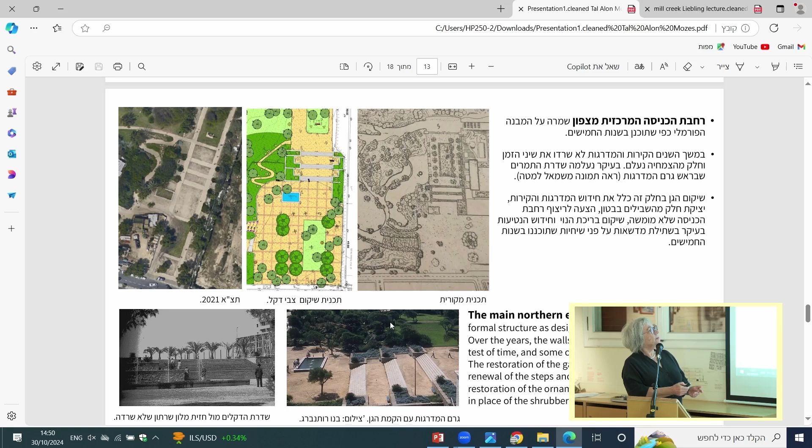הפרק הזה שמסרב לעבור, I can't, לא, אני הגעתי לסוף כבר. אתם הופ.

אפשר להעביר את המצגת למוד של תודה.

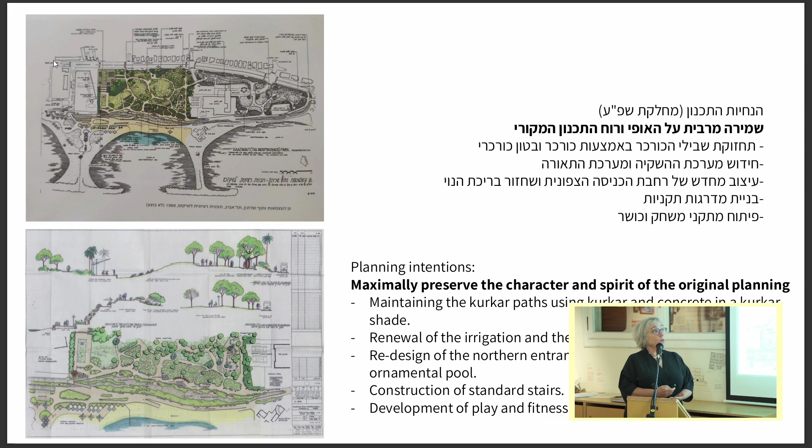מה שמעניין הוא שמי שהציע את השימור של הגן או את הפרוגרמה לשימור הגן זה מחלקת שפע, שיפור פני העיר של העירייה. הדגשתי בבולד שהעירייה בעצמה ביקשה לשמר במרבית את האופי ורוח התכנון המקורי, רוחו של אברהם קרוון, כאשר העירייה ביקשה בעיקר טיפול בשבילי הכורכר, חידוש מערכות כמו תאורה והשקיה, ודגש מיוחד על רחבת הכניסה הצפונית, ושילוב של פרוגרמות חדשות של משחק, ומאוחר יותר גם התייחסות לשיקולים של קיימות ושל טבע עירוני, שכיום חלק מהגן.

מי שהופקד על השיקום של הגן והשדרוג שלו היה אדריכל נוף צבי דקל, אשר נפטר לפני שבועות ספורים. הוא היה מודרניסט בהשקפה שלו, עבד עם בורלה מרקס בברזיל ולמד איתו, וכאן אנחנו רואים את תוכנית השיקום שהוא הציע.

אתם רואים את המרחבים הגדולים של הדשא, את השיחים בשוליים, את השיקום של רחבת הכניסה מצד הצפון, ומצד שמאל אפשר לראות את רחבת המשחק שבסגול.

אם אני אקצר ואדגיש כמה מהמרחבים האלה שעברו שיקום, אחד מהם הוא רחבת הכניסה מצפון, והיא שמרה פחות או יותר על המבנה שלה. אפשר לראות את התוכנית המקורית, את התוכנית של צבי דקל.

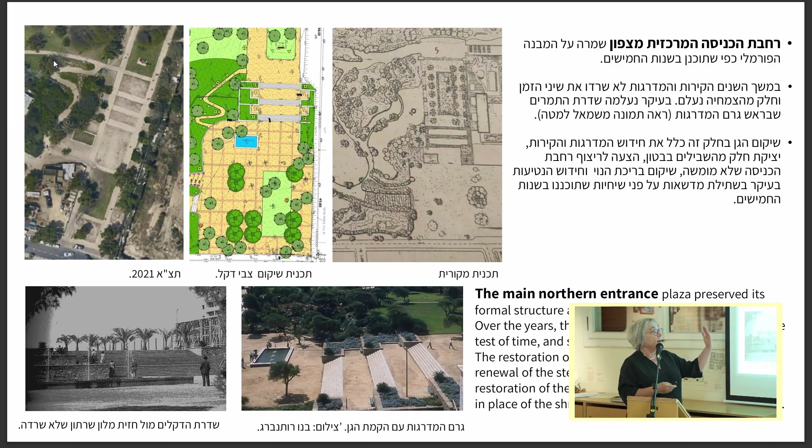חלק מהאלמנטים לא נשמרו בגלל שיני הזמן, כמו למשל שדרת הדקלים, ובגלל שבשנים הראשונות לא כל כך הבינו את ההשפעה של הרסס ושל המליחות. ובכלל, גם אחרי הקמת הגן קצת שינו את הטופוגרפיה שלו ויצרו הגנה על החלק המרכזי. הצמחייה של הגן נשמרה בחלקים רבים ממנו, אבל במשך השנים הלכה והידלדלה, והשילוב הזה של צמחייה מקומית מצד אחד וצמחייה ואזורים של מדשאות פסטורליות מאפיין את הגן עד היום.

פרטים עדה תפרט, אבל כאן אפשר לראות כמה דוגמאות יפות שנשמרו מימי התכנון הראשונים של שנות ה-50, של שימוש בכורכר בקופינג, במדרגות, ברחבות, ברצפות, וניסיון מאוחר לקחת את החומר הזה של הכורכר ולהפוך אותו לחומר יותר עמיד על ידי מה שנקרא בטון כורכרי, שכיום משמש חלק מהטיילת שבעבר היה כורכר כבוש.

וכבר הזכרתי את העניין של המעקות שהפכו להיות מעקות תקניים כפי שצריך. ואלמנט כמעט אחרון זה הבריכה הפסיפס של האומן שמעון צבר, ששוחזרה על ידי האומנית טלי שרמן, על ידי שחזור מאוד מדוקדק של האיורים שהיו בבריכה המקורית ומילוי שלה במים. אבל הבריכה הזאת עברה גם איזה טלטולים אפילו לאחר השימור הזה.

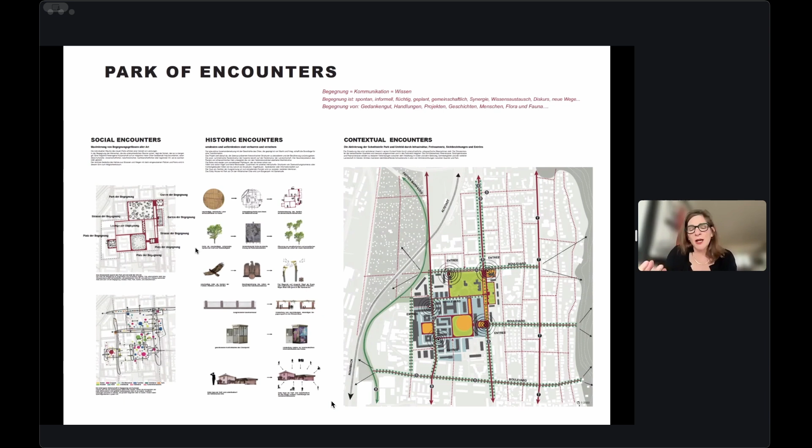So on one side, a maximum of historical encounters. What you see here is the concept from the competition: social encounters, historical encounters, and contextual encounters. I'll focus today only on the historical encounters. On the other side, the maximum of contemporary uses, so it speaks to both sides of us.

This is the historical aspect of the site. There are all these spaces and elements that are about control and power—that's what military occupation is. I wanted to keep those elements and make them the main storytelling of the park, but at the same time transform them into places and elements of social encounter.

So it's a double-edged sword: when you walk in the space, what you perceive atmospherically and physically is the military history, but then, tucked into that in a more subtle way, unfolds a very big palette of contemporary uses.

The reason I did that is I felt sensing these spaces was important to reflecting the history, but also because our cities have become so generic—all the places look the same.

Everyone puts a bit of lounge furniture or catalog furniture and a few nice trees, whatever. I think cities need to be a place of differentiation. They need this storytelling—they need to tell us about their history and where they've become.

I'll give 2-3 examples from this matrix, which I also did for the competition. The oak tree is a very famous historic symbol for power and strength. The Nazis took it over as one of their symbols. I made it the main tree species of the park, and so to speak, gave it back to the German population.

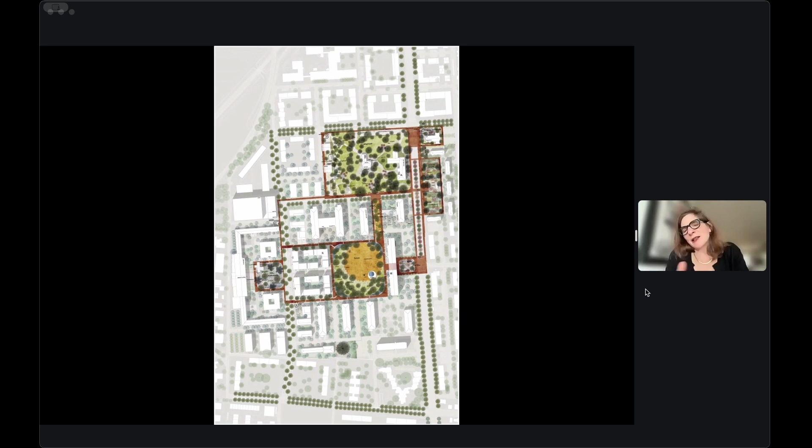Oh, sorry, just one last picture. You see here a vertical space connecting the parade grounds, or Forum, with the Nazi elite park, which is now called the Lounge. It's next to student housing and other uses, and I'll show you what I've done with these different spaces.

So this is the picture. I forgot to say explicitly, but I'm sure you got the message—we were able to win the two-phase competition, and it was just finished being built last year. So you'll see fairly recent pictures of the park.

I took former paving from the site and inserted very tiny little plazas around the park where researchers in the surrounding buildings, students living there, the neighborhood, and so on could appropriate these small spaces, while the park would keep its atmosphere.

This is what I call the cultural market, using this space in front of the cultural and creative activities. Here you see a little scheme I made for the competition.

These red lines show what we call the red band—a concrete paving band, which I'll show you in a moment, that unifies all of these spaces.

So the main concept, as you see in this black sketch, was that the unique historical atmosphere and task of each space was kept as its own distinct voice of its historical use as a military space, and I tried to preserve that with everything I did.

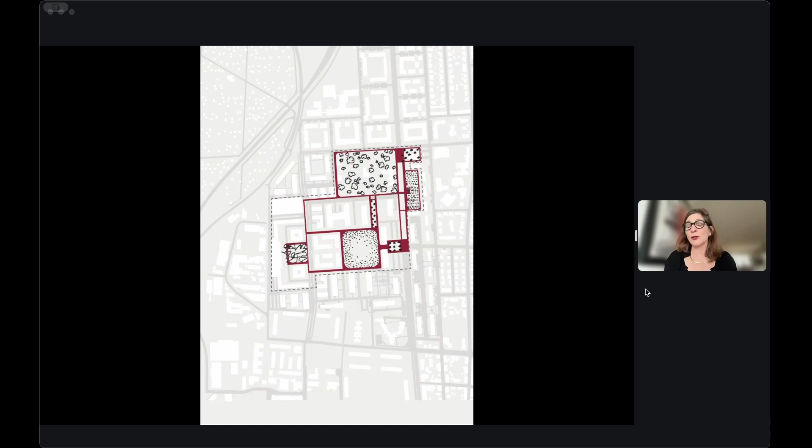And the red band, so to speak, unites them all into something we can coherently understand as a park.

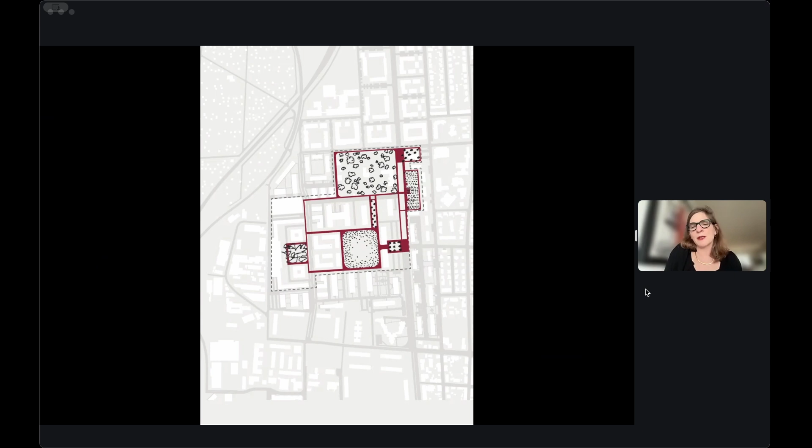For the red band, we decided to shred the many pavements found on site—these crappy concrete pavements from the Americans, and also natural stone paving from the Nazi period, and so on.

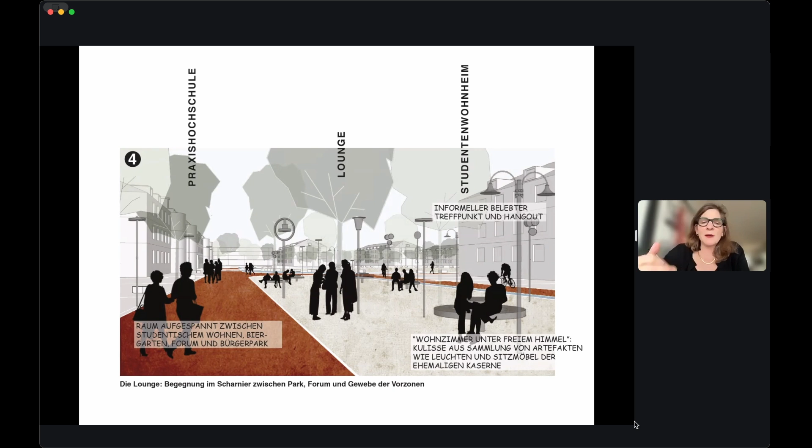They're speaking to us. For the lounge, it's this thin space connecting the major spaces. To the right, you see one of the old barracks from the 1930s, that will become student housing - it's not there yet. And behind us, the main building which I showed you in the beginning will become a school, and you see all the barracks buildings around.

I found this American furniture - the lamps, the benches and so on - so charming in their historical aura that I decided to make something called the lounge, an informal place for meeting of students, but also passersby, researchers, neighbors, etc., and they would just collect in these kinds of spaces. You see these kinds of cartoons which we made. I felt it was important to express the social uses of the spaces through these cartoons, to communicate this during the competition.

Here you see a photo also during the construction site. Everything's quite young, but you see the space with the furniture and the lamps, and it has really its own character, and it's very charming. Now the neighbors really come and fill up this space and love to meet here and sit casually and so on.

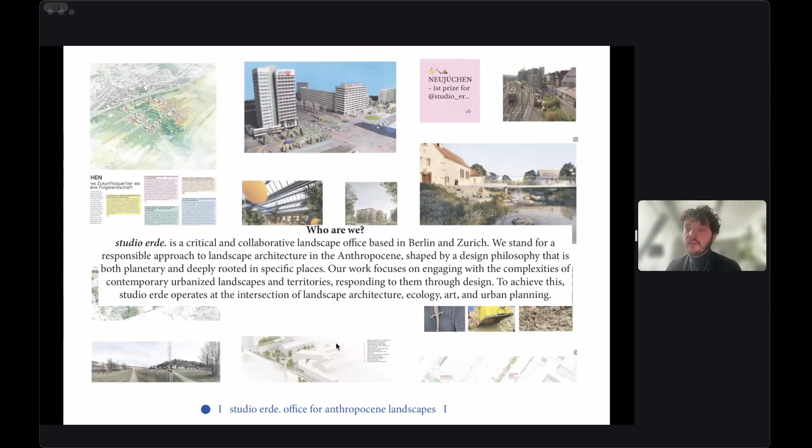Before that, maybe just some short notes about who we are. We are Studio Erde, it's me, Marcel Tröger, as already introduced by Sharon and Violetta, and we have offices in Berlin and Zurich. We are working for, or towards, landscape architecture in the Anthropocene. We believe that our picture of the landscape, this romantic picture a lot of us still have in a way, is kind of broken, and we have to rethink our attitude and responsibility in this new era.

That's why with our projects, and especially also the House of Statistics project I will share with you in a minute, we are trying to develop a new critical attitude towards designing, and questioning how and in which different ways we can design within different scales and with different actors.

And this is also part of the project for the statistic, where we were trying strongly to work not only with things we already know, like landscape architecture, plants, soil, but also with other metabolic systems and actors, such as animals, energy, infrastructure, but also a lot of rituals and practices.

House of Statistic, our project City as Stage, or Catalyst of Imagination. It's a project for two main squares adjacent to Alexanderplatz, so we are right in the heart, in a way. Berlin doesn't really have a center, but it's the historic center of Berlin.

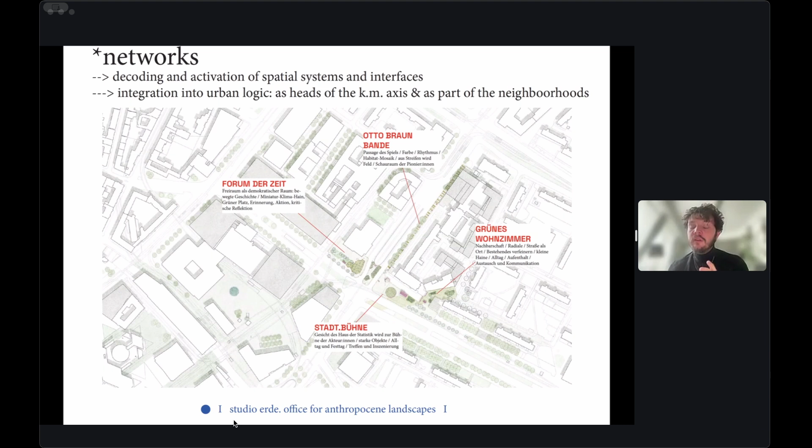We worked, as I already said, at this edge of Karl Marx Allee, but also close to Alexanderplatz. So we had to integrate ourselves into this logic of the urban structure, but we were also looking deeply at what actually was happening there.

What's interesting is that the GDR, by building this Karl Marx Allee neighborhood, erased almost entirely the whole historic city structure of Berlin. So you almost lost any reference to what was there before.

However, you can still find a lot of traces in the soil. You find traces of churches which were moved and erased. You find a lot of infrastructure beneath, and tunnels—there's a big network of tunnels beneath Alexanderplatz and also beneath our squares.

So we played with those revealed objects and traces, but we also played with the different networks we found, as I already showed you, the social network which was there. How, in a way, can the social network be related to this spatial network and those hidden objects?

That's why we identified and played with some cards—we call them play cards. We identified 14 objects, hidden or maybe existing, which serve as the main protagonists of our design scheme.

We didn't propose a complete transformation of the squares, but a very precise, and sometimes only acupunctural, reactivation of specific objects.

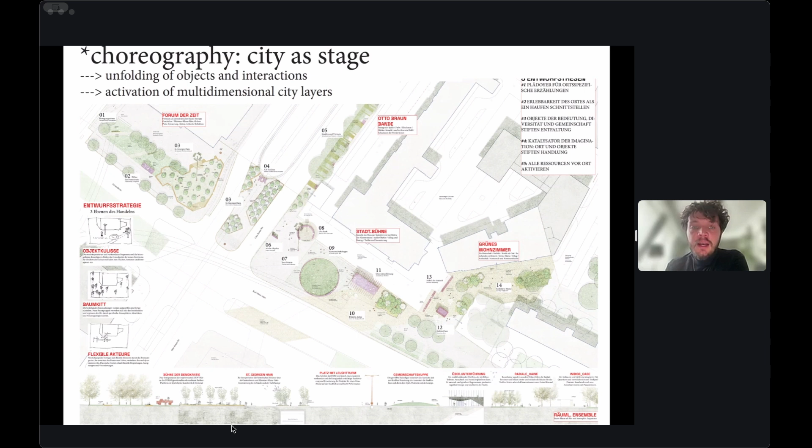This is a layout plan of the design. I will just go briefly through it now with some focuses.

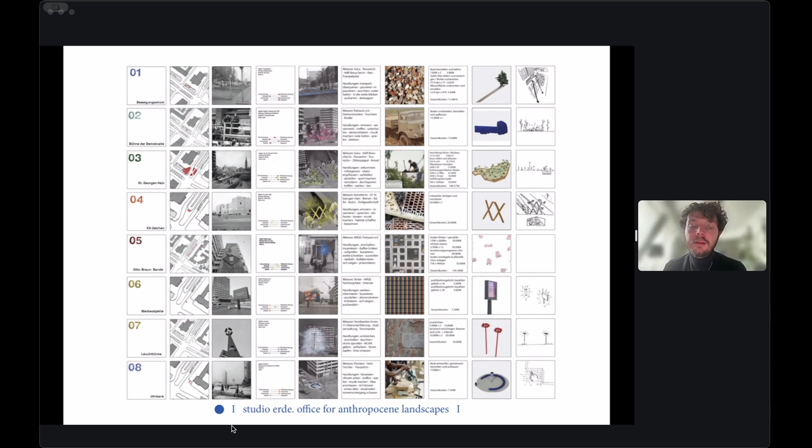What was a big part was thinking of this project as a process. So, as I said, it's a temporary project, and this temporality gave us an option, a framework to test out new things. I think this is also very important for Tel Aviv—that temporality is a vehicle for testing out new things.

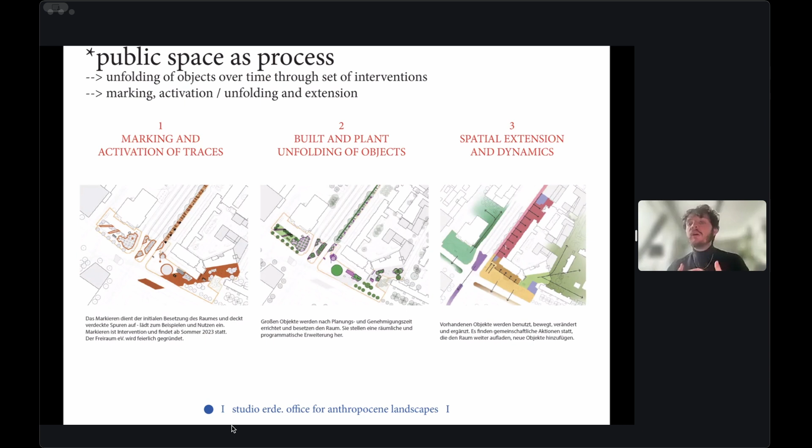So we had, in a way, a time frame of five years where we worked, first of all, in the first phase, with marking and activation of those traces. Then how those traces can be built, but also accentuated by plants. And then, in a way, how—maybe after they are rebuilt—they still dynamize and have an impulse towards the neighborhood.

A big part was also to integrate those objects into local metabolic flows. So a big goal of the project was also to build with the least new materials as possible.

This also contained plants. We're working together with a local tree nursery, Lorberg, one of the biggest tree nurseries in Germany, and they give us trees for free. This is a picture from one of the site visits there - trees which they usually would throw away because they are not perfectly grown, they have some mistakes, and we reintegrate them.

It's also part of an art project my office partner Violetta is doing together with Andreas Greiner, called Wild Woods. I'm sorry, I think you hear my little daughter Tal - she's screaming a bit, sorry for that.

Another part is also not only to reuse plants, but also to reuse water and energy. So our objects also create energy. For instance, there's this pavilion which Bell Architects is doing, which accentuates a tunnel underground situation - it sits on an underground tunnel and accentuates this hidden infrastructure, which produces energy through PV panels on the pavilion.

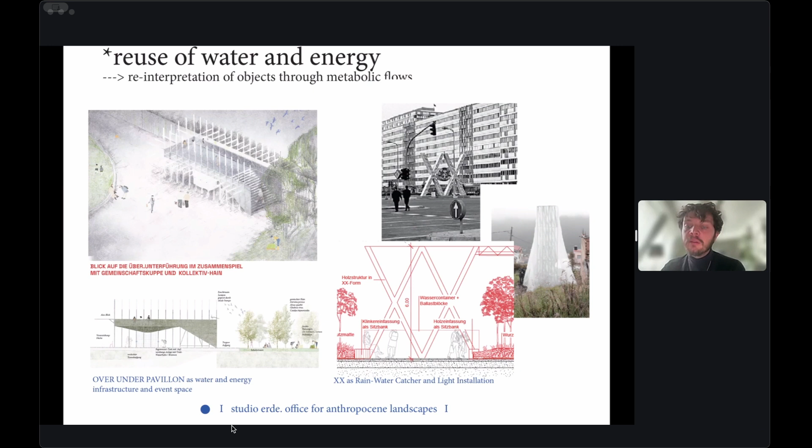It also collects rainwater which then serves for watering of the trees nearby. But also this structure, which is a direct reference to a GDR sculpture that was there, also serves as a rainwater collector.

We worked a lot with those aesthetics of temporality and those different actions that come with this strategy, and also this idea of how to integrate local materials.

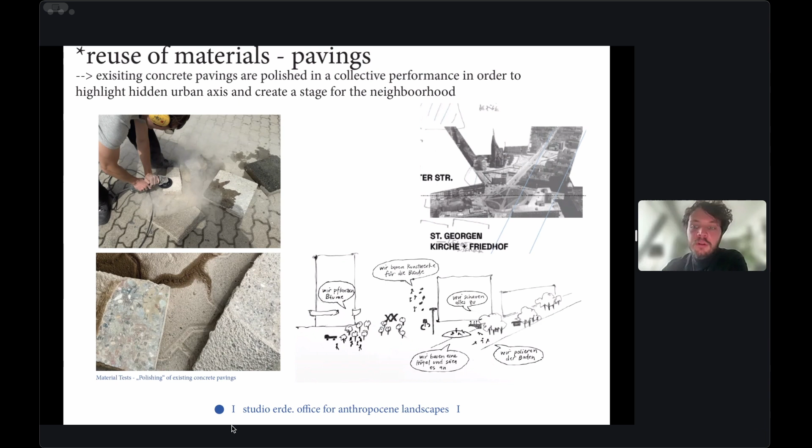Also in terms of very tiny interventions, for instance this idea of polishing - how can we accentuate the existing pavings? A lot of the square is covered with concrete pavings, and we are proposing this idea of a performance of collective polishing for one of the axes. You can see a little material experiment we did some months ago, where suddenly almost a terrazzo atmosphere is created through a very tiny intervention.

It's all kind of also integrated within this idea of a curational network. We developed this framework, and I think this is also interesting for Tel Aviv maybe, and for more experimental projects - of course, for testing out those experimental projects, you need actors you can rely on. You need to build a network of actors who will care for those spaces. That's why we proposed in a way an amuta, like a corporation, which serves as curators for the development of those sites.

This is the last slide. As I said, this was a first activation last November, where we did a lyrical promenade at night, where we lit our different interventions and read poems on those interventions to give a glimpse into a potential future. Currently we are in the phases of permission, and we hope that in the next months there will be first results we can share with you. Thank you, and looking forward to the discussion later.

Thank you very much, Marcel. I think it's very important to understand that we would also like to engage community in the activity of public space. And how do we do it? It's a very interesting possibility that you showed us with public participation.

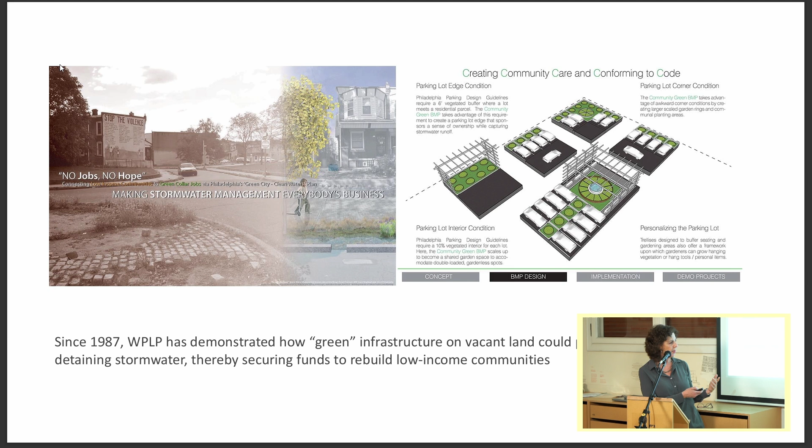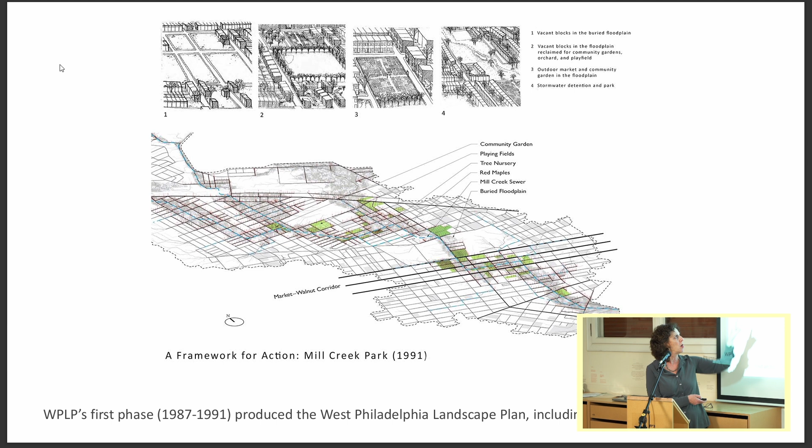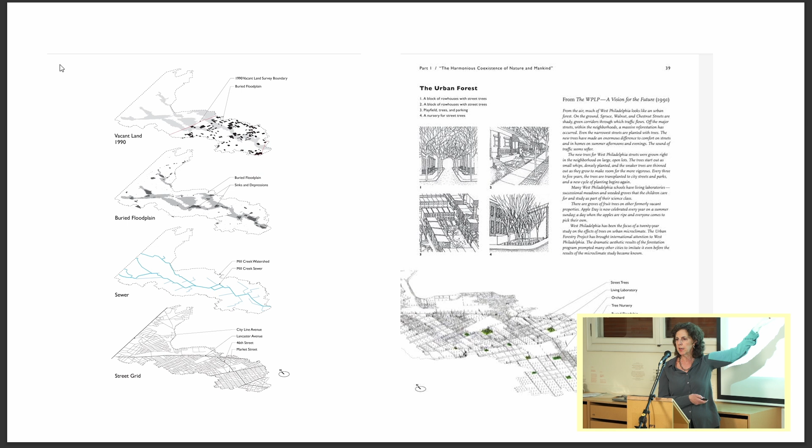You can see further examples of the studies provided in the first phase of work done by students that led to a proposal for the West Philadelphia Landscape Plan, looking at these networks of urban parks, with some images above showing what they can look like. We have more analysis of the interrelatedness of these systems on a citywide, or at least a watershed, scale. We also see the local implementation and the physical expression of what they might look like. This is, again, student work.

Some of this work also had to do with designing community gardens. This is one example you see here. This was done later, so it had a multifaceted aspect to it.

One thing that was very interesting about what was happening with this work is that all of this work I showed you previously led up to a plan, but the plan was never adopted by the city, which led to incredible frustration. And yet, it led also to a very interesting second phase of the project that I want to now talk about.

Spirn began to realize that she needed to focus on education. And she started to ask a second research question: how could local youth be engaged and empowered to affect neighborhood change? In other words, if all of this work wasn't getting anywhere at the level of the city, something more fundamental had to happen first.

So she took it back to the level of the neighborhood, and she entered the schools in the neighborhood, a middle school that she began to develop a relationship with and develop a curriculum that went on for a number of years. I think this is one of the really fascinating aspects of the project.